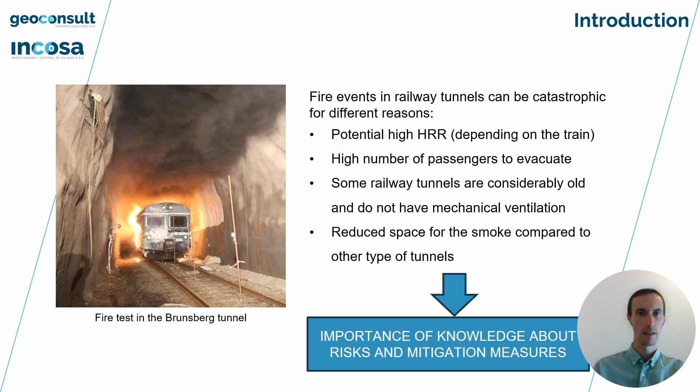In accordance with the previous introduction, this modest research intends to give some light about some of them, taking advantage of the works performed for the natural ventilation studies of 3 different tunnels. Originally, the ventilation studies of the 3 tunnels were different and isolated. But as the methodology employed was the same and the input data are similar and comparable, it was decided to put them together in order to try to get some conclusions from the risks associated with the absence of mechanical ventilation in railway tunnels.

Here we can see the main characteristics of the 3 tunnels: the cross-section, the width of the evacuation walkway, and the slope of the tunnels.

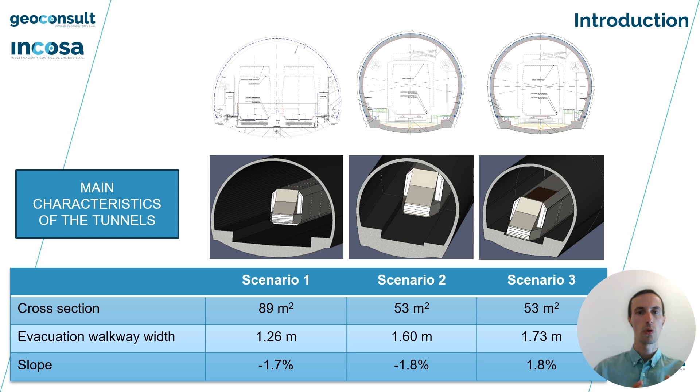The methodology considered for the studies was based on the comparison of ASET and RSET times, which is a well-known procedure for performance-based design. In this case, there were some differences regarding the implementation of this methodology in other buildings, as the space and movement possibilities for the evacuees are lower than in other kinds of scenarios. This will be explained in detail in the following slides. Basically, the ASET time was obtained from CFD simulations made with PyroSim, and the RSET time from simulations made with Pathfinder.

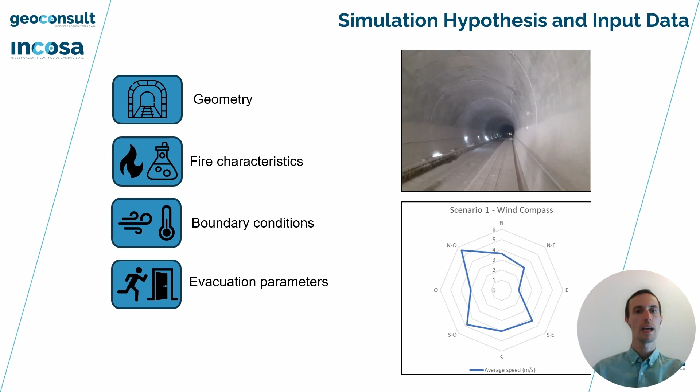Now, we are going to see some relevant aspects related to the simulation hypothesis and the input data. In the cases simulated, the input data for the model was divided in 4 different groups: the geometry of the model, which is imported from 3D modeling and was already defined, the fire characteristics, which were defined based on the data for the trains that can use these tunnels, the boundary conditions, defined according to local temperatures, wind, and pressure differences between tunnel portals, and the evacuation parameters, considering the population, the pre-movement times, and the walking speeds.

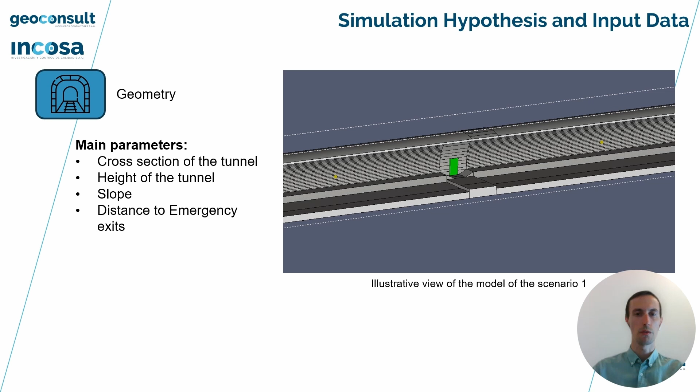The geometry of the tunnels is extremely relevant for the results, as parameters such as the cross-section and the height of the tunnel are directly related to the height of the smoke layer. Additionally, the slope of the tunnel plays an important role, impelling the smoke in the direction contrary to the slope, in what is known as the stack effect. Finally, the last geometric parameter to consider is the distance between emergency exits. In railway tunnels, it is considerably longer than in road tunnels, and it can vary substantially between different railway tunnels, making each case a singular one.

The fire characteristics are determinant for the development of the simulations. In the scenarios studied, as they were developed for Spanish tunnels, the heat release rate curve was taken from the Spanish standard IFI, which gives instructions for the design of railway tunnels, including the heat release rate curves to be used in case of passenger trains, freight trains, and dangerous goods trains.

The case of two trains inside the tunnel was not considered, and consequently, in terms of ventilation and egress, the worst case was a fully loaded passenger train, so the value of 15 megawatts was considered. It has to be noted that the simulation begins when the train has stopped in the tunnel, and consequently, the heat release rate at the beginning of the scenario is not zero.

It's about 2 megawatts. Finally, regarding the material considered, it's a common practice in trains, more in medium-age ones, to have glass-reinforced plastics, and more specifically, polyester. Therefore, and considering that not all the trains that will use the tunnels will comply with the latest standards, polyester was considered as the burning material, obtaining the burning properties from the SFPE handbook.

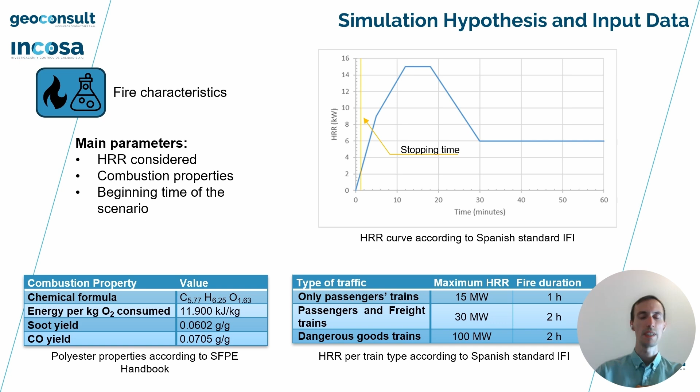When assessing the smoke layer within the tunnel, the ambient temperature and internal tunnel temperature are key factors. Therefore, data from weather stations close to the tunnels were used to establish the baseline conditions. For external environment, the 5th percentile of recorded temperatures was considered as the reference point. Inside the tunnel, the wall temperature was determined based on the average temperature during January, the coldest month.

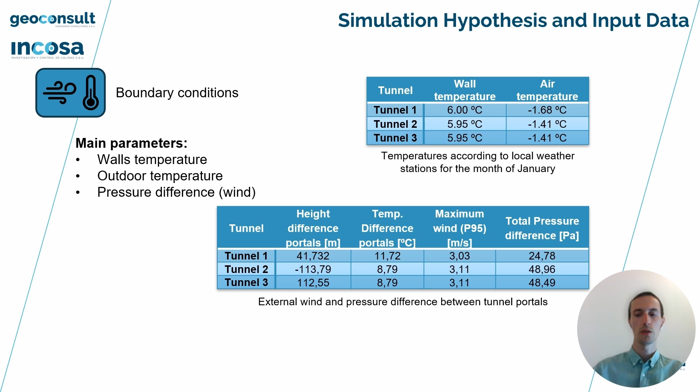This approach is critical, as lower temperatures can lead to increased mixing of the smoke, which in fact can complicate the evacuation efforts. Additionally, the pressure difference between the tunnel portals was critical, as it can move the smoke in the same direction as the slope, or in the contrary one. The pressure difference is influenced by the external wind and the height difference between portals. This was calculated according to local data measured by weather stations.

Regarding the evacuation parameters, the key factors are the total number of people, the speed at which they will be able to move around the scenario, and the distribution of population. In each of the three scenarios, the occupants will be situated between the train compartments, with no people present in the tunnel at the beginning of the simulation.

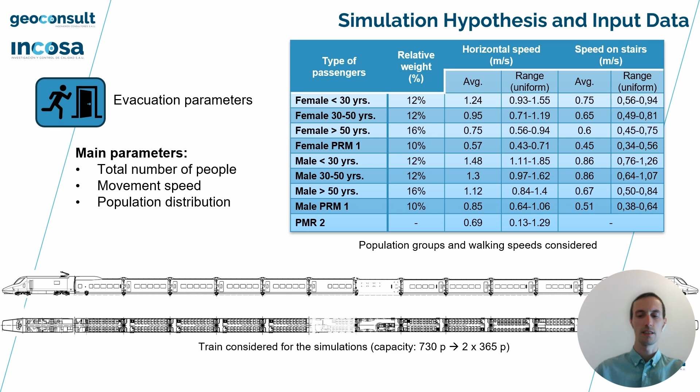The population distribution was considered from the investigation report, evacuation analysis in high-speed trains based on computer modeling and simulation, from the GIDAI group of the University of Cantabria, which is a reference in Spain for this kind of study. In addition to the evacuation parameters already seen, three specific considerations were made.

In first place, as there was a remarkable step from the train floor to the evacuation walkway, a speed reduction factor of 0.5 was applied to this stair in order to consider the difficulties for the different kind of people to exit to the walkway. In second place, it is acknowledged that walking speed is reduced when visibility falls.

For these simulations, the speed reduction curve included in PyroSim was used, coming from the studies of Fridolf et al. Nevertheless, other studies also included the lighting level as a factor for the correlation between smoke presence and walking speed. This consideration could also be a possibility for future evacuation studies of controlled environments such as tunnels, in which the requirements of lighting levels at the walkway are very well defined by the standards.

Finally, for pre-movement times, alarm recognition and response time, it was considered that the public address system of the trains, as well as the presence of train assistants inside the train, would lead to a negligible pre-movement time. Even more, considering that a fire which leads to a train detention in a tunnel, which is highly improbable, should be detected long before the train is stopped, and consequently, onboard staff will be warned.

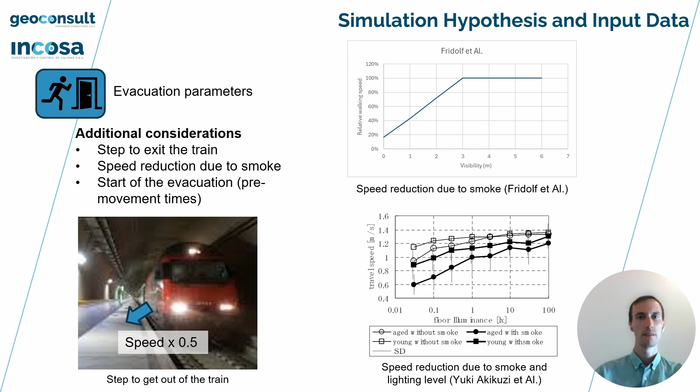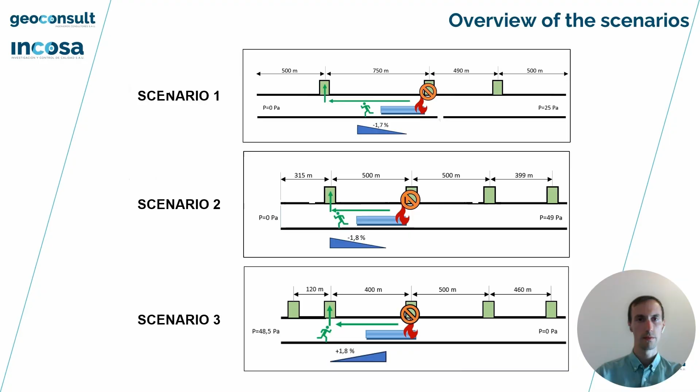Now, it's time for the results of the scenarios. For all the cases, measures were taken 2 meters high from the evacuation walkway. In first place, we are going to talk about temperature. As it was previously explained, the boundary conditions imposed were those from the coldest month, January, so the maximum temperatures due to the fire are low. Consequently, temperature differences are analyzed.

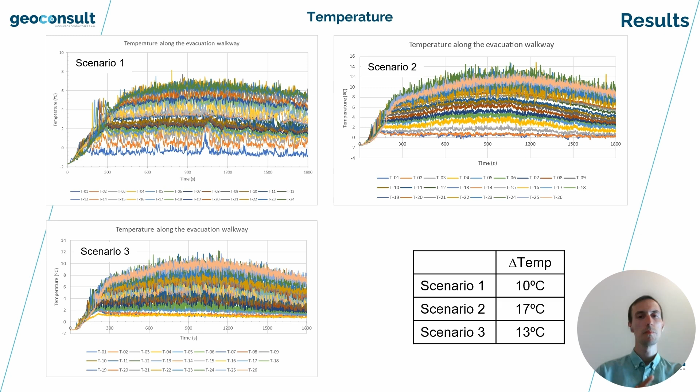It can be seen that in scenario number 1, the temperature increase is the lowest from the 3 tunnels. This is logical, as this is the one with the biggest tunnel cross-section. Regarding scenarios 2 and 3, the second one is the hottest, as the cross-section is reduced and the smoke is impelled in a natural way towards the evacuees. Finally, scenario 3 is in a middle point between the two previous, having a reduced cross-section, but with the stack effect not impelling the smoke towards the evacuation pathways.

Now, let's see the visibility. The 3 scenarios present a similar behavior regarding the visibility, with some little differences. In all the cases, it falls below the common limit of 10 meters considered for normal evacuation, as for example in standard NFPA 130. In the first case, as the tunnel cross-section is bigger, the visibility is reduced less than in the rest of the cases. Scenario 2 shows the lowest visibility, being about 1.5 meters. Finally, scenario 3 has a very low visibility of about 2.5 meters, slightly greater than scenario 2 due to a favorable stack effect.

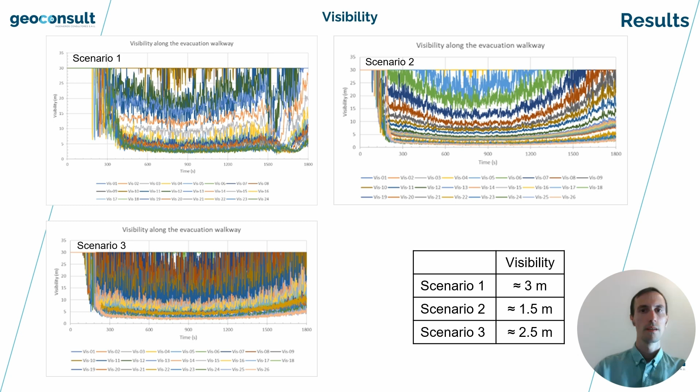Regarding the thermal radiation, all the scenarios have a low impact on the evacuating passengers. It's remarkable that in the case of the second scenario, with a narrow geometry and the smoke impelled towards the evacuation path, it reaches about 110 watts per square meter, which is quite lower than the limits commonly considered. It has to be noted that the first meters around the fire are not considered for the measurements, as they would distort the global.

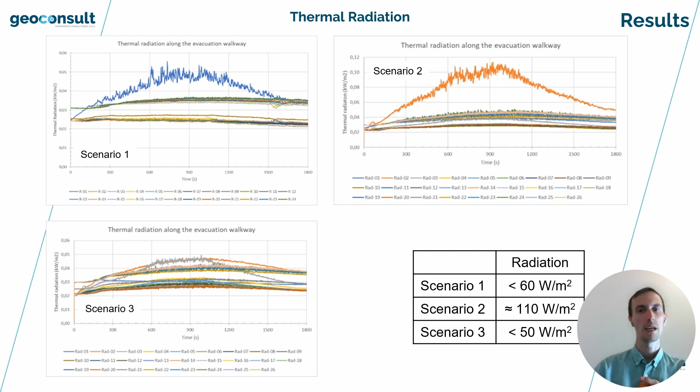Finally, the poisoning measurement, the fractional effective dose. For the 3 scenarios, it has been computed by Pathfinder based on the results from PyroSim, and these results correspond to the most poisoned passengers. It can be seen in all of them that none of the scenarios have problems regarding the FEDs.

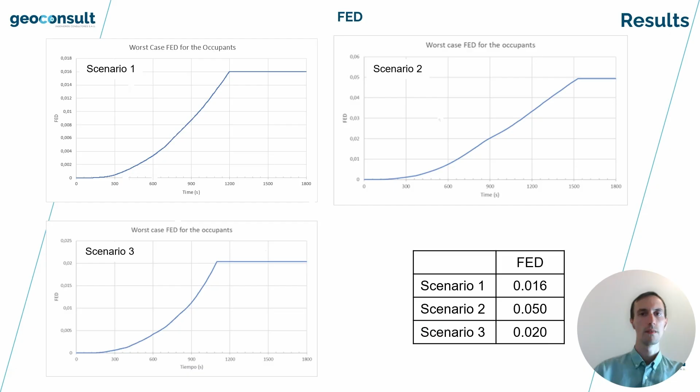Once shown the results, it's time to discuss the conclusions reached in the analysis of the 3 cases presented. The analysis of the 3 scenarios revealed that the absence of mechanical ventilation in the tunnels leads to the restrictive outflow of smoke and reduces significantly the visibility along the evacuation walkways. This reduction was more pronounced in tunnels with smaller cross-section, as is natural. Other tenability parameters analyzed, such as thermal radiation, temperature, and fractional effective dose, remain well below commonly accepted limits across all the scenarios. Therefore, we can conclude that the primary risk during the evacuation in all the cases was the lack of visibility and consequently the associated fire products not accounted in the FEDs.

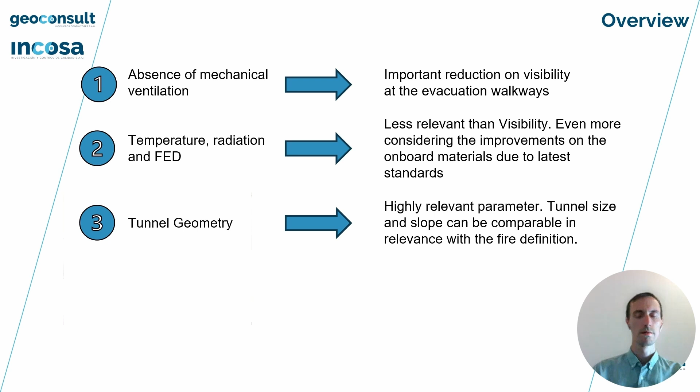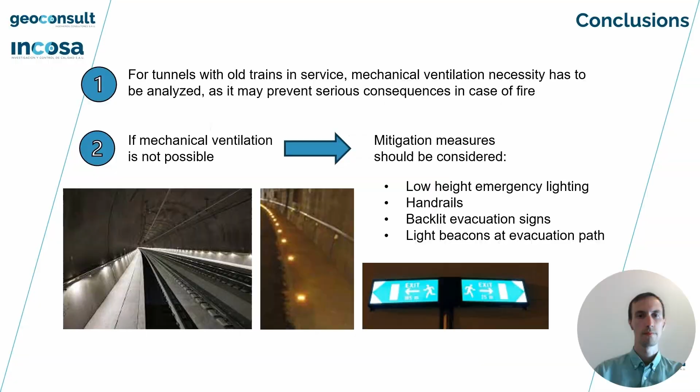Regarding the occupancy groups, what was the reference of those assumptions? Okay.

In this case, it was a little bit easy because, okay, and there's a second question. In Spain, there was a study about the percentage of different groups of people that usually use the train, the long distance train. So in this case, it was easy to get the information.

Regarding the percentage for the handicapped, in this case they were not considered because these kinds of trains originally were not prepared for these people. But I have to say that now modern trains are considering at least one handicap place in each train, or two, depending on the size of the train. So probably these kinds of studies should be done again, considering the people with reduced mobility.

But one point regarding the people with reduced mobility: they already were considered. People with reduced mobility were considered. People in wheelchairs were not considered. And well, regarding the other question, a different way. The pre-travel time in this case was considered to be 0 from the moment the train stops.